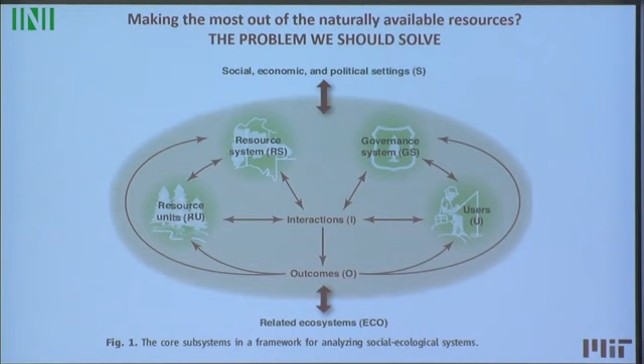As you get older, you get a little bit more pessimistic. I heard Janusz yesterday - so should we be worried? As I was listening the last 2 days, and I'm sure it's going to be the same way, we are really overwhelmed by this complexity, this mathematical complexity, the type of things that we have.

It's fair to say that for electric power systems, they were not designed that way. Control and planning was not designed for any guaranteed performance. Now you put these new technologies on the system, you want to operate them differently, and system operators say, can you guarantee the performance? Well, you can't, because from the beginning the system was not designed that way. That has all sorts of implications that I don't want to go over here.

There are a lot of people in the US at least working on what they call interoperability standards, so that manufacturers and vendors of different technologies can exchange information - ABB gadget can talk to Siemens gadget and so forth. But what I've observed is that that's not sufficient.

What information you exchange, whether you're using it for feedback or feed-forward, the system is going to do different things. So there are all sorts of implications here, and not to neglect the fact that we also have to rethink teaching of these systems - it's multidisciplinary and so forth.

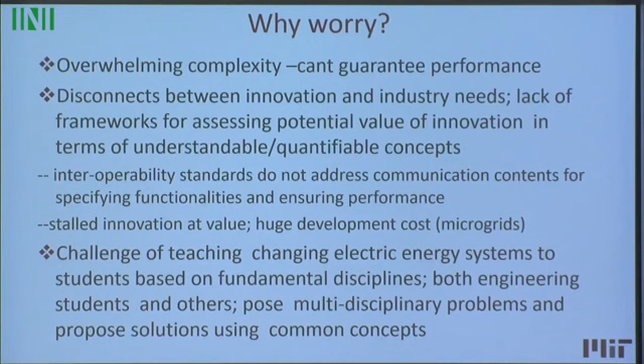These are the worries that I want to somehow address, and the premise that I want to put forward is that operation and planning is really no longer just centralized.

We have to think about that as data-enabled interactive decision-making by multiple heterogeneous decision makers. You have tons of different users, tons of different resources, small, large, and so forth. So what are the fundamental issues with modeling, simulations, and computations for these systems? We don't know how to stand in front of the classroom and introduce this in a simple way without requiring people to be specialists and so forth.

So this dynamic monitoring decision system framework that we're working on is basically one way of conceptualizing what's happening in the system, modeling these interactions and utilizing them for both operating the system, planning, and also for aligning it with markets if the governance system is market. So we've been using it to assess, depending on what functionality you want to give to different components and what is the benefit that component is bringing, to actually rethink even the market design, because markets have emerged first for energy, but there are many other things we have to think about if you want to align the economic value with the technical thing.

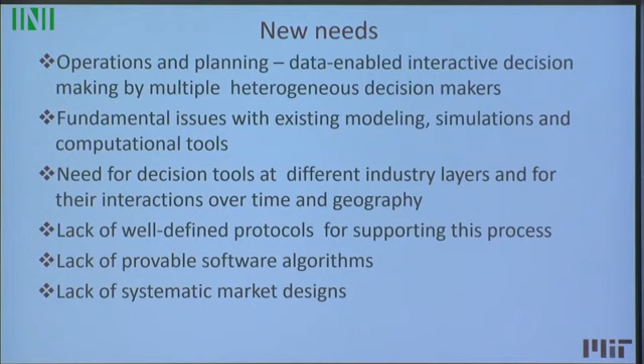Okay, so to start with, why we took this step back to rethink modeling and simulation tools. Again, I don't want to go through these here, some of you know, but if you look at the typical simulation and modeling tools that people use for different purposes in power systems, they are fundamentally weak when it comes to challenges applying them to the changing systems, because if you want to simulate them as a single flat entity, a monolithic entity, nobody can do that.

And I'll show you, like, a nuclear plant has 100 states, a hydro plant has 50, and so forth, and they're interconnected with the grid. So if you want to model it as one single thing, you can brute force the simulations, and you can get some numbers, you can get some plots, but there is very little insight of what all this means.

And the one that I'm particularly interested in, because I like to put myself into control design, is that most of the models that we have in power systems, like the transient stability model, are a set of differential algebraic equations. And if you think about what we know about control design for DAEs, we know nothing. Dave is sitting there, I think he early on did work on that, and maybe he could disagree with me, but it's very hard to design control for the system operating over very large deviations.

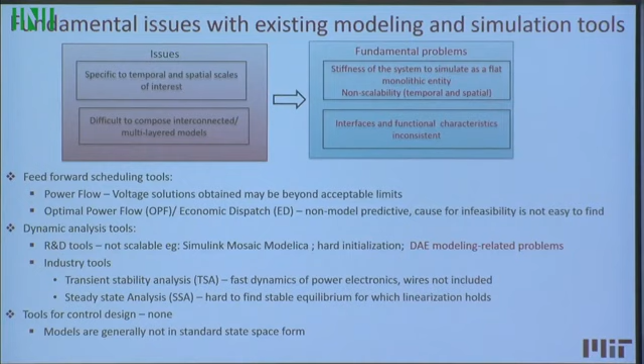And the only dynamics that you have is in the nodes, at best. So is that really so when you start controlling the transmission wire, which has its own time constant, and you can control it and so forth? This is what we have, and I don't have much time to go through it, but for example, I hear quite a bit that people in Europe are using Modelica to simulate DAEs for power systems. It's multi-physics, it's nice, but it's hard to initialize. You have algebraic loops. These DAEs are just not good when it comes to dynamics.

And the other thing is, we basically need to rethink even modeling and simulation of new phenomena. What do I mean by this? Transient stability analysis programs that people run offline for the worst contingency to see if the system is going to be stable, they only model the electromechanical phenomena, a little bit of the dynamics of the electromagnetics inside the machines, but they don't model at all the power electronics and solar processes and so forth.

So what one of the students showed here, if you, for example, want to simulate response to study offline whether your system is going to be stable or not, using typical transient stability analysis software, you're going to see that the system is stable at the time scale that it captures. Now, actually, if you model the dynamics that come from the time constants you have inside inverters and so forth, you see that things blow up at the faster time scale.

So we see this just as an example in ERCOT. They have a very real problem - what they call a control-induced subsynchronous resonance, but it's not mechanical, it's magnetic. A controlled wind power plant by one manufacturer, power electronically controlled, tries to send power on a weak line, which is controlled by a series capacitor controlled by power electronics from another vendor, and these controllers start fighting at a time scale we didn't even model in our transient stability analysis. This is getting to be a very big problem when you have a lot of power electronics on the system.

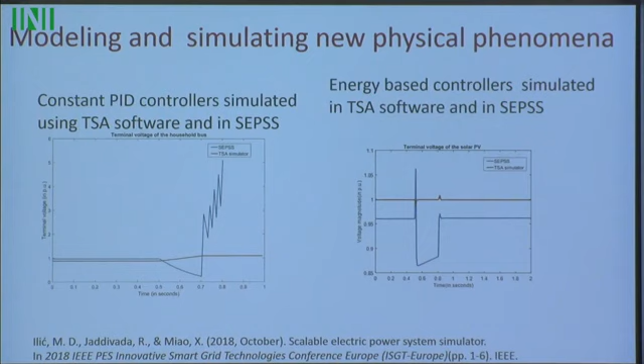Okay, so we need to rethink the modeling and simulation for new physical phenomena, in particular because at the edge you have a lot of power electronic stuff.

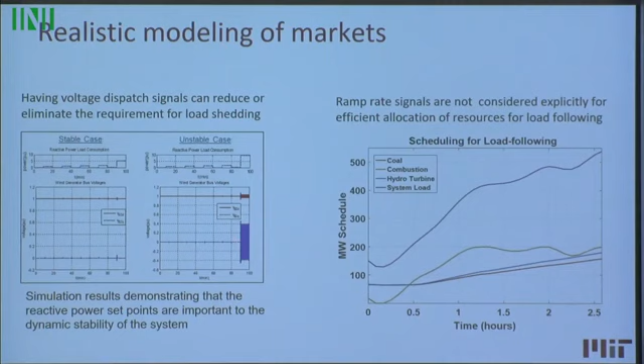So the other thing is basically the problem on the markets - you need these details, but then you get lost in details, and that's what I want to talk about, how we deal with it. The question is what level of granularity we need to capture what's happening in interactions with markets, because it's not just energy.

And the other thing, people already talked about this at the meeting here, is that not all components, not all resources are capable of responding at the same rate. So you need models that capture that. Most of the models we have for DCOPF, for energy-based clearing, don't account for a model which would capture the rate of change at which these outputs change.

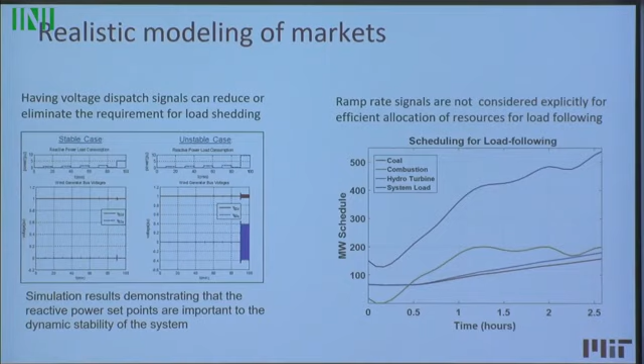Okay, so this is just a motivation for what I refer to as maybe some basic modeling principles for simulations. We're using it for this SEPSS scalable electric power system simulator we've been developing for a long time. But the challenge at the end is to have a very detailed physics model at the component level, and then at the higher level not require much detail to capture the interactions. And that's, as I described, this new feature of power system modeling that enables one to, in multiple layers, capture different levels of temporal and spatial granularity.

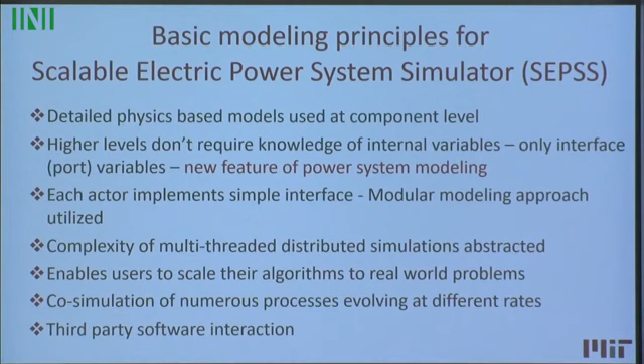And this also has implications on software and numerical methods that we use. Okay, so this became our sort of staple picture in which the idea is all that we talked about these last 2 days can be put in this picture. We call them DyMonDS - these are distributed decision makers. The talk by Claudia from Brazil was all about that.

If I am here, hydro, what intelligence do I have to embed to capture my own constraints if I'm demand or hydro? And how do I do bidding if I'm in the market? What information do I need to exchange with the control center? So what we have now, at least in the US, and I think in most of the world, is that information goes from the central control center down to distribution level, and there is not much information.

So you actually cannot capture, even if you want to aggregate, there is no IT support or SCADA to capture the effect of these responses of players, of agents at the edge, so that you do something more efficient at the centralized level. So the idea is different, and it becomes a very big job.

For example, John Donady did DyMonDS just for vehicles and fleets of vehicles - you have to model, you have to decide, they have to learn, the same way it was presented for some other technologies just before the break. And then at the substation level, maybe you're an aggregator, you need intelligence. And so this is, we believe, the basic architecture, the information exchange architecture that one would need.

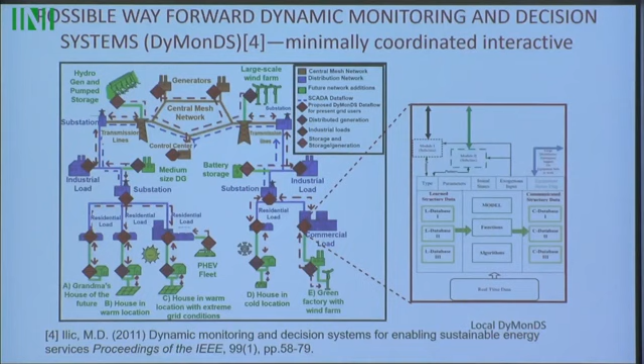I hate to even admit how long I spent on asking the question, and driving my students crazy, about what is the minimal information that you have to capture without worrying about what's inside. That's what I want to run us through. The basic idea is that this is what industry is now: you have a multi-layered, modular interactive environment, and you need a framework for modeling, control exchange, and so forth.

We did, some time ago, this edited book on Azores Islands. It was a self-contained island, and you show that if you embed this intelligence into demand, into geothermal, hydro, you can actually get rid of that ugly fossil power plant in the middle of the island, and the thing with some intelligent control still works—no frequency problems, nothing. So some people have used this as a text to introduce the smart grid, because it's sort of self-contained on an island.

So what is the basic question that we have to deal with? As I mentioned, the big problem is how do you develop these distributed algorithms given the very unique features of different technologies, preferences, risk preferences, environmental things, and these distributed algorithms—this is the basic idea—would internalize heterogeneous physics, multi-temporal decisions, and uncertainties.

In other words, all the complexities are embedded in, internalized into bidding, if you want to think about the market, and then you have relatively simple information exchange in between. So that leads us to the basic question: does this make sense theoretically, and can you say something about whether such a paradigm works or not?

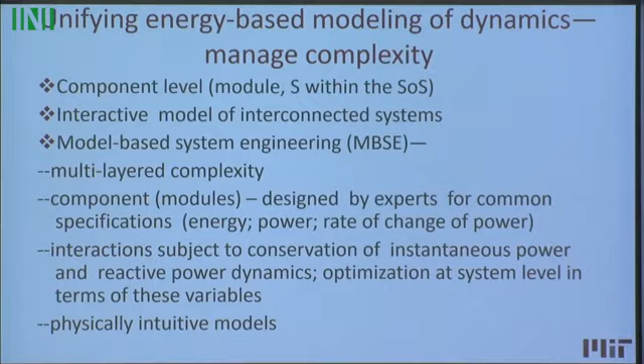Another way to ask it: can one manage complexity using common protocols for the general case of nonlinear, mesh, selective power networks? It's a very hard, loaded question where you have many heterogeneous dynamic decisions, multiple time scales, different things, right? This is work with Rupamathi Jaddivada, joint work. We have been working on this unifying energy-based modeling of dynamics to manage that complexity. So I'll show you the fundamental mathematical approach to the modeling, and then we can go back—okay, so here we go to the math.

We've already had this, like yesterday, Professor Motter was talking about dynamics when you have bifurcations and so forth, but that nonlinear dynamics happens because at the component level you have dynamics which depends on its own states, its own local control, local disturbances, and these are effects of the rest of the system to which you are connected. So you have just a sort of systems modeling that we use for dynamical systems.

One thing, it's a structural thing in power systems: you can show, doesn't matter what type of technology you have, what type of box you have, that this interaction can always be thought of in terms of instantaneous power—that's the exchange, everything else is internal state. And these yi's, these outputs at the local level that the component cares about, like quality of service, frequency, voltage, and so forth, but local—this structure begins to help us now answer this question about minimal information exchange.

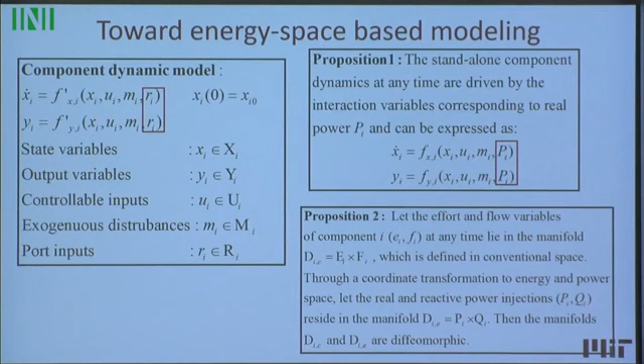Let me jump over this because I want to explain it, and it didn't have a picture. So I can think about every box here that it has its own dynamics, and there is a lot of work, for example, on bond graphs—static bond graphs and so forth—where it doesn't matter if this is mechanical, fluid, energy conversion, electrical. You can think that the ports can be characterized with two variables, which is effort and flow. So in electrical, it becomes voltage and current; in fluid, it becomes mass rate and pressure and so forth. It's very general for multi-physical things.

So these port states and port inputs become very important. In the interactions, I don't have to worry about interfaces or what's inside if I just want to capture the interactions, but I need to say something about how these port variables change—and they are not just electrical, they can be anything. So the minimal information basically needed in each module—this is the minimal information. Modelica, for example, is based on the same thing, because at each module you have to have Kirchhoff's law at the interface.

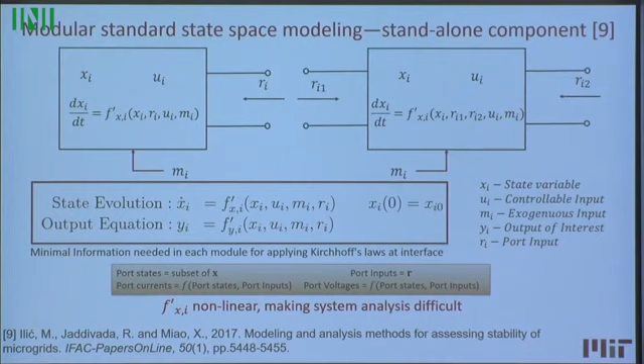Okay, so what is the basic idea? Now the basic premise is that we are talking about energy systems. We are not talking about information processing systems. So what we want to know is that as these generators and solar and so forth produce some power, we want to know the dynamics of the work, the energy flow, and the rate of change of power exchange rather than just necessarily some current and voltage, because that doesn't tell us much.

This begins to make the case for mapping that very complex dynamical model, which is technology specific for a component of interest, into something that you can characterize on the interface. And this becomes very important because it used to be that you can model dynamics of large power plants in terms of inertia. Now on the inverters, solar, you have the notions of synthetic inertia. We talked about this morning. It's a sort of an artificial proxy for the dynamics that you have internally in the inverters.

But what we see is that these heterogeneous end-to-end conversion processes, this is one conversion process, another one, and so forth, they are based, if they are inertia based, then we have the approximations. If you look at the state of art, for example, in particular for inverter-based control, people start with the droop characteristic. That's a proxy. That's not the right model. With that model, you cannot capture that instability I was talking about in ERCOT.

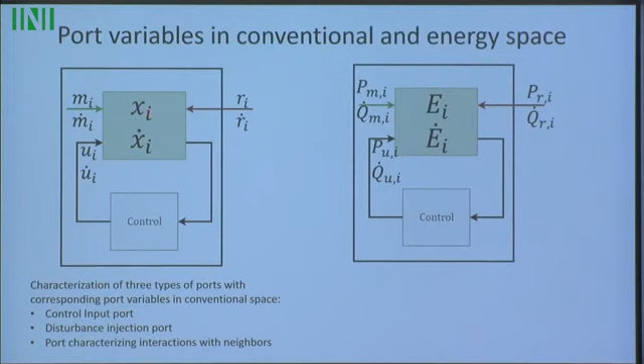So basically, to summarize, every box, every component, doesn't matter what it is, it has its local primary control, it has its own dynamics, local disturbances and inputs. And for interface purposes, for modeling interactions, we now map this original state space into stored energy, rate of change of stored energy, which is power, and rate of change of reactive power. And I'll give you definitions. Once you do that, here are the more formal definitions.

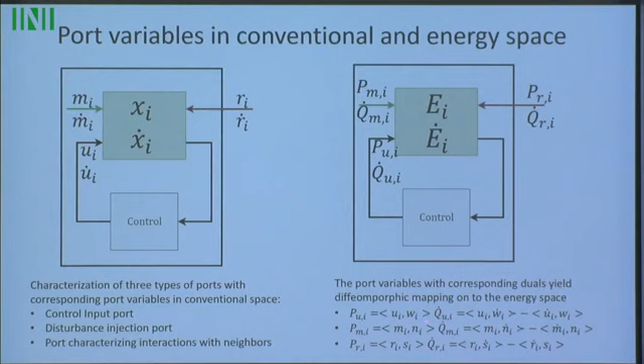Instantaneous power is basically scalar product of effort and flow, doesn't matter what physical thing. And reactive power is a little bit more complicated. John Wyatt and I wrote a paper in the 90s that I didn't think it would be used for anything. But so you can have notion of the instantaneous reactive power, which is effort times rate of change of flow minus flow times rate of change of effort. This is instantaneous, it's not average. It doesn't have to be for periodic signals.

It took a while to do, but basically when we arrived at this is the following. That internally, at the component level, you have this structure. And you remember I mentioned this instantaneous power is always there, that it goes out. Internally, we have the mapping from many, many complex states into stored energy, rate of change of stored energy as state variables. And there is a relationship between those and instantaneous power and instantaneous rate of change of reactive power that goes to some other components.

So this was, I think that this became a golden formula that I want to highlight to you. So this is fairly straightforward. The rate of change of stored energy is power that goes out minus thermal local losses, right? That is first law of thermodynamics. The second law, and there are connections with second law of thermodynamics, this is second derivative of stored energy is, this is ETI is energy stored in tangent space.

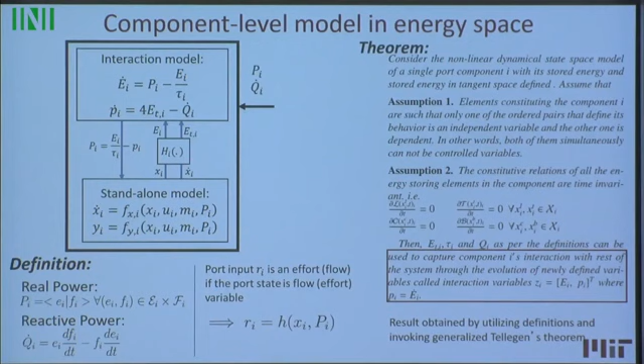And the proofs are obtainable just using the generalized Tellegen's theorem. I'm not going to go to the proof here. I want to show you how this is now used.

So now I want to interconnect two components. I can have source and load, and each one has the same structure. I can have an induction motor, controlled or not controlled, it has this structure. The synchronous machine or inverter-based control of the solar has the same structure. So it becomes very, very simple in terms of interconnecting them.

And on the interfaces, we basically have this generalized Tellegen's theorem: the actual instantaneous power that goes out of one box is the same as the one that comes into the other box. And rate of change of instantaneous reactive power that comes from this box is the same as rate of change of instantaneous power that goes out from the other box.

We didn't write this, like when we write quasi-static equations for reactive power balance, we don't write the dynamics. And when you start talking about electromagnetic phenomena with power electronics, you really have to take these dynamics into consideration.

Okay, some very simple examples. So if you have this RLC circuit, it's very easy to build this model. You have magnetic stored energy in the inductor, stored energy in the capacitor. This magnetic energy in the tangent space for the inductor: 1/2 L, instead of I squared it's dI_L/dt, and similar for the capacitor.

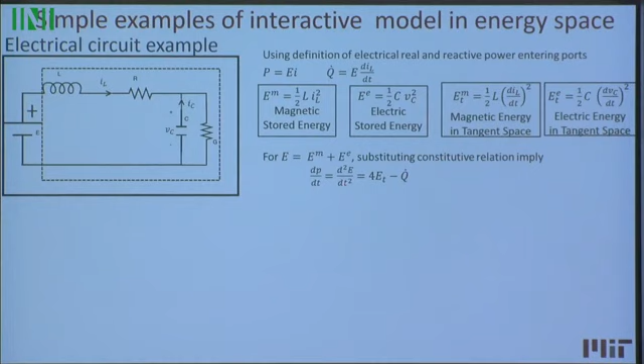And now for the entire box, if I want to think about it as the whole box, the second derivative of stored energy is this energy in tangent space minus what I lose in reactive power.

And there is the thing that caught us by surprise, we were doing this first with electrical, but there is complete analogy for mechanical, and we are using this now and working with NASA, with aerospace people. Like if you want, for example, to control instability in the engine of the aircraft, you can control it with battery, with hybridization, by controlling mechanical torque twist, which is just that reactive power. So you stabilize that, and we have a couple of patents on that recently. But the idea is very simple, that you can write this for any physical system, electrical, mechanical, and then connect them.

Okay, so why were we so excited about this? Why have P and Q been chosen as the interface variables? A completely different twist to this is that P actually tells you intuitively what is useful work done, and Q dot tells you what is the wasted work, at whatever time scale you want to think about it. And both of them obey conservation laws at the interfaces.

So that was not all. Now you say, okay, I interconnect these things, I have dynamics of the interfaces. David, you worked long ago with Moylan on stability of passivity. So here, you can use similar things for this interconnected system, but you have to be very careful with choosing the storage Lyapunov function to be the integral of this real work done, and the supply function being rate of change of reactive power. Then you prove, and it doesn't matter what's in the boxes, you begin to establish stability conditions in terms of these interface variables, both for the component or subsystems, groups of components, and it's additive, which is very interesting.

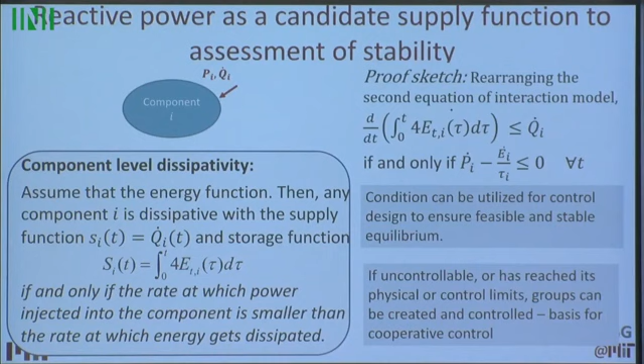And stability condition, here one version of stability condition is very intuitive. If I have this component, the rate of change of real power, instantaneous power that I push in, should be smaller than the rate of change of dissipation, so I'm stable. So the math comes very nicely together with the physics, which we have in the passivity theory and Willems' work and so forth. It's very hard to do, in particular if you go beyond just the real power dynamics.

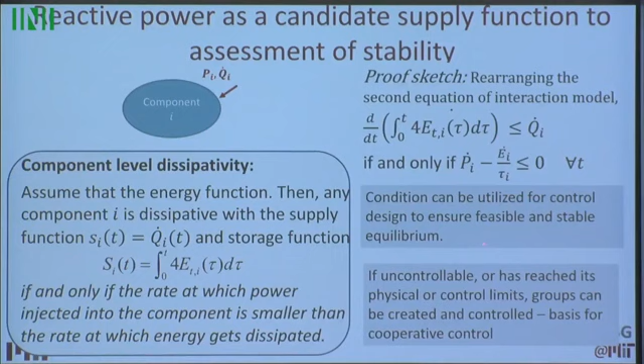So this condition can be used for control design to ensure feasible and stable equilibrium, either at the component level, or you can do very similar conditions, because these conditions are additive for subsystems. The sum of all the power injected into a subsystem has to be smaller than the sum of power dissipated inside the subsystem, no matter how many components you have.

I don't have time to talk about this, but it's still work in progress and it's very intriguing. If you have our typical voltage collapse problem, say I have a source and a constant load, PQ load, the question is where is the voltage collapse, where is the fundamental limit to how much the transmission line can transfer. The community has tackled this problem many different ways, but one way is to think in terms of energy.

This is a sufficient condition. The maximum real power deliverable to load, now think about load as a component with constant real and reactive power requirement, which is a tough requirement, is the most you can deliver without going unstable. It's quantifiable in terms of rate of change of reactive power of the load times the time constant of the transmission line. So you can take different systems and establish sufficient conditions for the interconnections for stability.

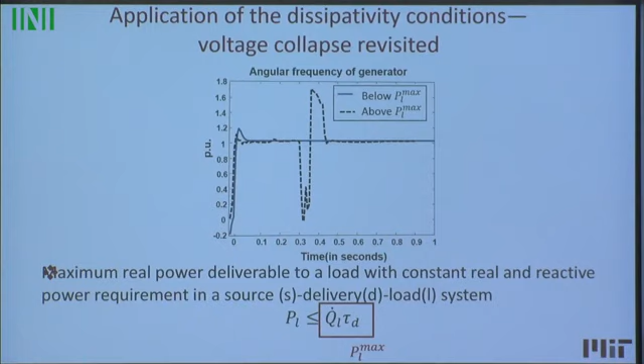We simulated the response when, for example, you put a load which is below or above this maximum, and you can see that angular frequency goes unstable if you go above that. It's still a sufficient condition, but even simulations confirm that. So that's one thing to take away.

If you are in this domain where you have on the interfaces state variables which are real power and rate of change of reactive power, you can say something about stability of the interconnected system in terms of just those variables. You don't have to worry about what's inside or what type of technology you have.

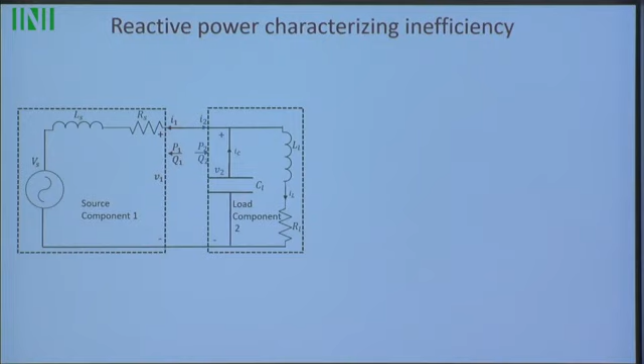The other part is when we want to connect the role of reactive power with efficiency because of the markets. Here's a simple experiment: I have a source with some inductive resistive line, and this is the load. I want this source to deliver maximum power to the resistive load, because that's work. I want to vary this capacitor, we do this in power systems all the time, so that we reach the maximum. If you change the capacitor and do the experiment, you see that work done, this blue line, increases as reactive power decreases.

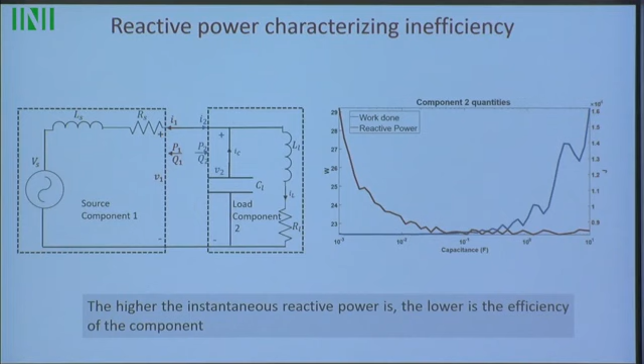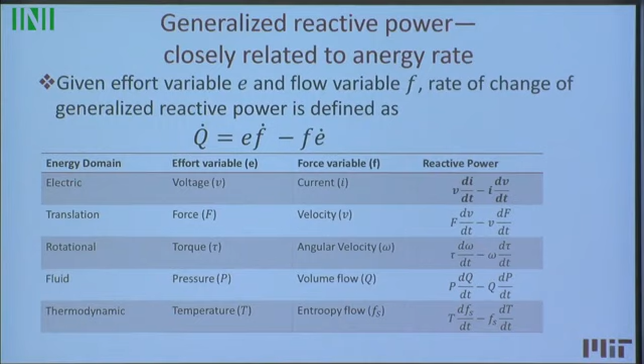So basically, the higher the instantaneous reactive power, the lower is the efficiency of the component. It tells you quite a bit, and we actually have to connect it somehow also with efficiency in the markets for those purposes. This table just shows that you don't have to talk about electrical components, it's generalizable to any physical system.

Okay, so now I want to return to the market. We have the model, I can say something about stability. So the question is, does this help me forget about what's happening in the boxes and do multi-layered design? What we typically have, this is what I think Schmor said he hated this morning, is transactive energy management. You have basically a load serving entity and a lot of load forecasters going to the ISO, but there are a lot of agents which are bidding.

And the question is, can you show how to design the bids by these different agents which have physics, which can go unstable, which can be efficient or less efficient? Think about them as the boxes that I described, and they create the bids, and the ISO clears the market, these interfaces in the energy space.

The typical thing you're going to get if you write the dynamics of your component and you want to do some objective function, maximize local profit or something like that, given the expected locational price, you are going to get time varying bids. Just if you exchange the locational price, and take into consideration, like it was described by Claudia just before me, you can take into account many specifics of your preferences and so forth when you create the bid.

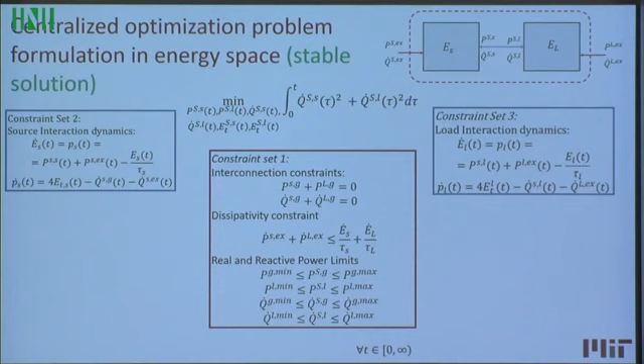But probably this one is most interesting and most unique. I can actually formulate this centralized optimization, taking into consideration stability condition. People don't do that. You get an optimal thing which blows up, as I showed you before. So the constraints are all in this space. Rate of change of stored energy is PL, and so forth. PL dot is all that we described before.

So here is where you pay the price. The price gets paid at the component level, but you have a lot of choice. This is what we want to actually enable. If you have, let's say, a synchronous machine, the control is valve position and field excitation, so there are limits on how much control you have. You know what local quality of service you want, like voltage and frequency, and this is your own dynamics.

So basically everything else is in the energy space, but here, I'll walk to the next step. The source standalone component dynamics are messy. So that's where you put all of the complexity.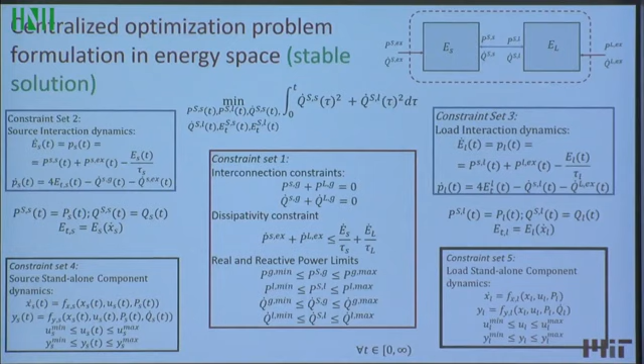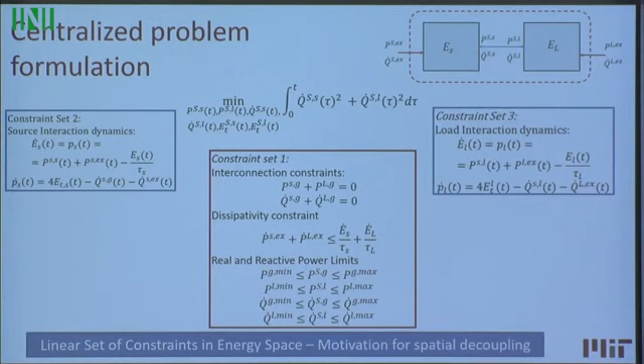So one big point, and I think it's a sort of point of departure if we think about this even for markets, because if you do this optimization in energy space, this is a linear optimization problem. You are out of big trouble because we do AC OPF and stuff like that. We don't know where we are going and so forth. And well, it's never free.

The thing that I want to point out here is that if you begin to think about how that market, transactive energy market or market in general, works, from the coordinator level, you exchange expected prices, and the generator level problem is to minimize its own cost subject to physical control design. So these all stay stable and you are within the limits. So you have full freedom there to design the bid function, and you just tell the coordinator up what is the power, what is the limit on power, and the range of rate of change of power, rate of change of reactive power that you can provide to the market, and at what price out of this distributed optimization.

So this needs more work. Here we still have, it was first, you remember, this is physical inefficiency, and you always have the trade-off between physical inefficiency and market inefficiency because people give different. These are the bid functions for now for real power by the source, by the load, everybody can bid, and the cost of bids of reactive power now. So we have to extend somehow in the markets to bring the reactive power, but without too much complexity.

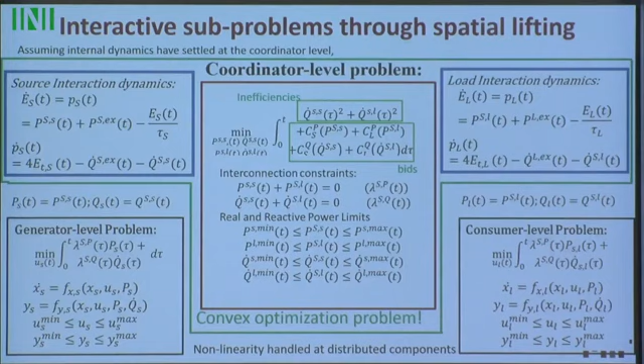You can include a lot of temporal uncertainty. If you're a battery, you can optimize over the entire day and bid just for one hour ahead. But you continue optimizing in a model predictive way, knowing your physics and everything. And so it goes, right?

So we have a couple of examples here. I'm almost done. For example, this interaction model, we just started making them, of closed loop solar. So this is what the solar system looks like with some internal details. Energy space model is more or less the same as for anything else. You just have to discover that if you look at this solar PV control, there is energy stored here and stored in this filter.

That's stored energy, then you write your dynamics of the interface. And then you can design power electronic switch control for the battery so that you ensure that power output, real and reactive power, rate of change of real and reactive power, actually is something that you could do subject to your constraints. This is a big issue because in markets, we say, you tell me how much power you can produce, you generator, but you're actually not controlling power.

You're controlling frequency, your set points of frequency and voltage, so there is no guarantee. There are all these slips depending on over which time scale you are participating in ancillary or not. Here you design a lot of this, and we're working with another student who is just finishing his thesis on designing nonlinear control for this switching, so that in closed loop you can guarantee that solar produces power in a certain range at a certain rate. We cannot align markets unless we actually have that guarantee. So there's been a real disconnect between how we control our components for quality of service, for frequency and voltage, versus what we are telling the market.

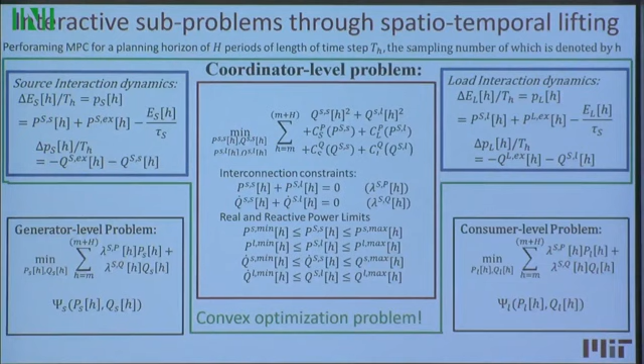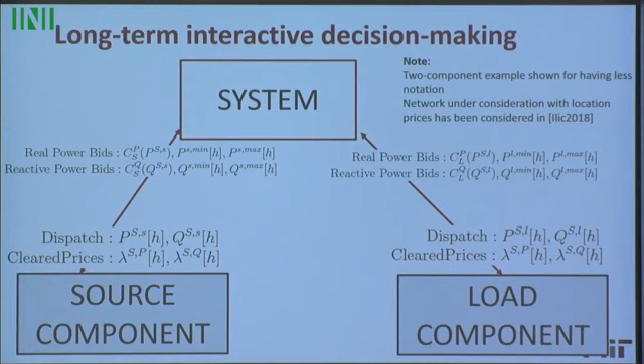I can go a little bit more over just the math of it, but just for completeness, to put it for the market: you're basically exchanging the source, the bidders are giving the bounds within which they can produce something, and then the market clears according to that linear optimization problem within those bounds. And so it goes over time, over different time scales. So, done.

We did this with NIST on transactive energy management. You get quite a few interesting things, but that's basically my conclusion. Thank you.

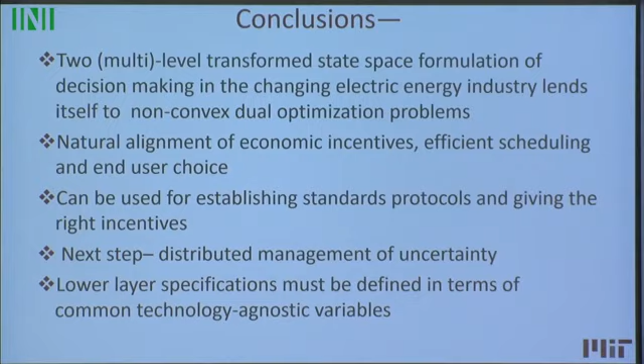So questions, please. Any questions at the end of the hard day? I suppose.

Any questions? Yes, please. So when you look at these component level dynamics, does it matter that these things are vastly different sizes in terms of your interaction model? Do you take that into consideration somehow, or does that affect your solution? I think this is a really great question, because you can do it without worrying about that, but the aggregation is very interesting.

You know, how many of these small ones I'm going to put together—that's more of an organizational question. It will work if you exchange information, but if you remember, below the substation you have a lot of small guys. So in transactive energy management, they're talking about aggregating at the substation level and going up. The aggregation question, and somebody was talking about it today, is quite open, because it buys you simplifications in terms of what you need to manage at the interaction level. Does that make sense?

Okay, yes? Yeah, John. So I'm trying to get a handle on the motivation for the modeling framework. Is it that the motivation is to push the computational complexity to the lower layers, and then you sort of go backwards from that idea?

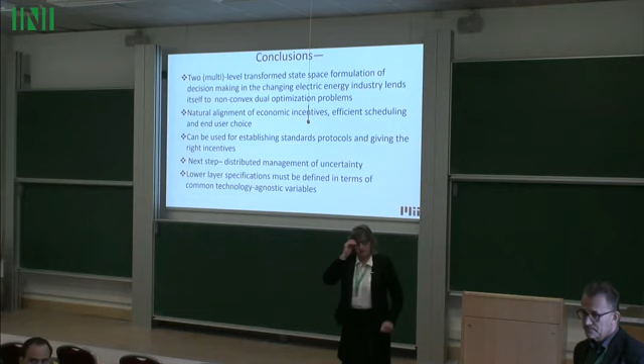Yeah, David. Marija, it's fascinating to see the connection back to dissipativity. Yes. My subject before power system.

So the big question we had years ago was developing Lyapunov functions for stability analysis, and in dissipativity theory there's this nice scaling aspect that all passive systems together are still passive. Yes, additivity. Contractive systems, which Jean-Jacques made a lot of use of, put together, the whole thing is still contractive. But we never had really good Lyapunov functions for voltage behavior.

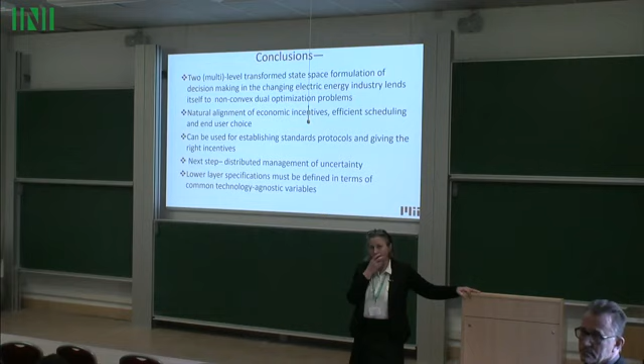That was always difficult. Yes. Much more difficult than for angle behavior. So is there some prospect of...

That's exactly, I don't want to go now to the slide, but that's exactly what I showed, because the supply function is Q dot. That's voltage. Can you scale it up and get a Lyapunov function across a big system? It's the sum of all of those integrals, and that's actually the work in tangent space.

Okay, and I think it's published? Yes, it's published. I think I sort of put most of the references there, but I'll be happy to share.

Yeah, because that's why I mentioned, because my students use your and Moylan paper all the time, because I think what happens there is exactly what you said. You could not define the Lyapunov function and supply function well if you have the voltage dynamics. And this came somehow through some other developments, and there was always some hope.

I remember Chris DeMarco years ago presenting a kind of an energy framework which had promise. Right, something, I don't know, never got finished. The problem is a lot of those, and some people are working on Hamiltonian systems, the problem is that those conditions get so messy mathematically. Here is, I know physically that I can take any combination. If I don't push more at a faster rate of power in, then it dissipates. It just makes physical sense to me, and then I can have different combinations if I design my components.